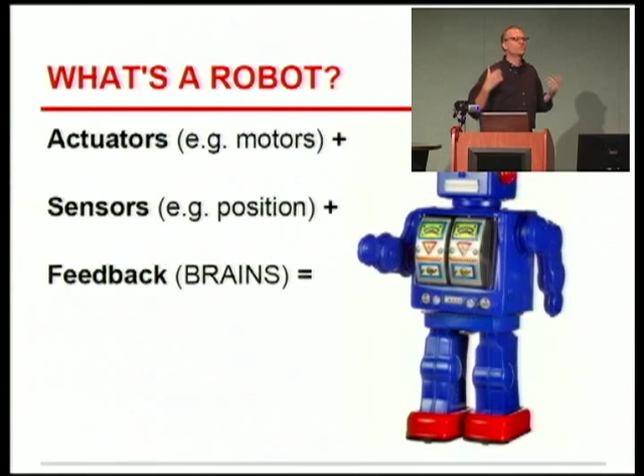Okay, what's a robot? Well, this is my personal take. People may disagree, but a robot for me has to have three important things. It's got actuators, motors to zip it around, or a robot arm. It has sensors, which tell it what it is or what's going on in the world, and it's got some kind of feedback, which tells it what to do based on the sensor input.

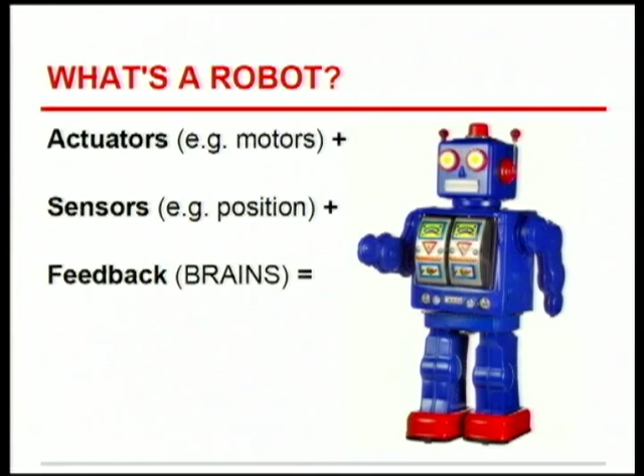Okay, so let me introduce you to my first robot, and this is my friend Chassis. Chassis is basically a mobile kegerator. He's got little motors on the base, and he drives around and dispenses beer from a keg that's stored in his internal unit there.

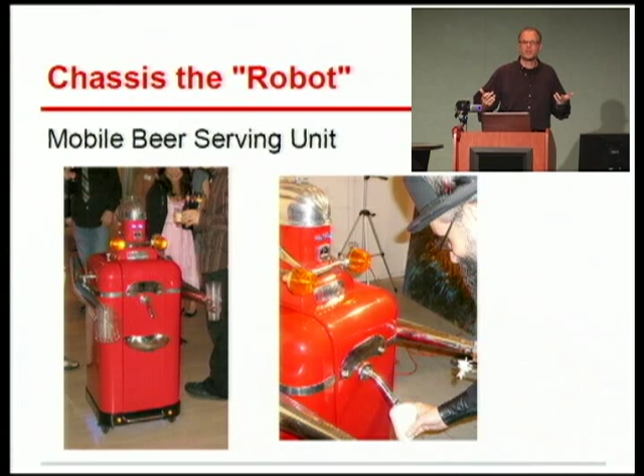Chassis, by my definition, is not actually a very smart robot. First of all, there's no Python. Second of all, there's no real feedback. The way Chassis works is there's some jerk with a remote control, that's usually me being the jerk, driving Chassis around. So he kind of fails at being a robot by my definition.

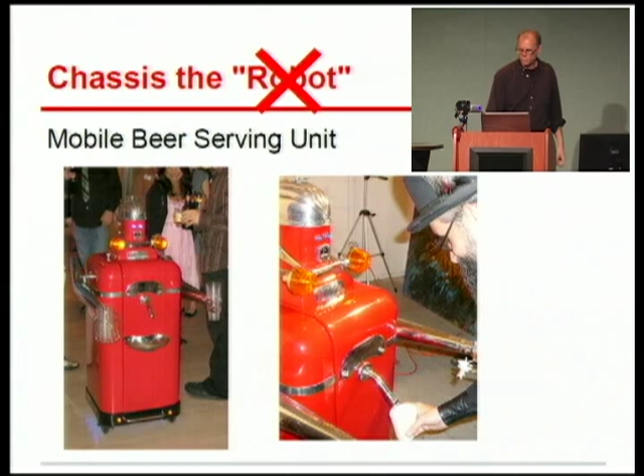Okay, so let me show you something which doesn't look like a robot, but which is closer to my definition. Okay, TCHO is a chocolate factory that's down on the Embarcadero in San Francisco. Anybody been there? If you're down there, the Exploratorium is opening up right next door, amazing chocolate, go down there and get a free taste. But they built a chocolate factory right there in this old warehouse on the Embarcadero.

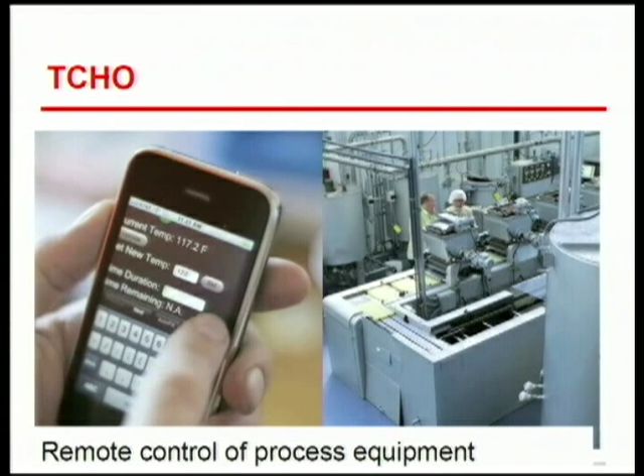And this was founded by some of the people who started Wired, so they wanted some high technology in their chocolate factory. So I helped them with a system that basically lets you control some of the things in the flavor lab from an iPhone system. And this is kind of how it works.

On the right is a nice little iPhone app. It wasn't even an iPhone app, it was a specialized, basically, web server that formatted things nicely for the iPhone. We even got real-time video on it. Basically, we had very standard SQL, Apache web server. Python was the glue that let the web server talk to the equipment, and the equipment talk back to the web server and thus to the iPhone.

So kind of the magic box here, this is an Ethernet to serial port here. Now if you want to do a drinking game in this talk, you can drink every time I say serial. I'm going to say that a lot. Okay, and right down here is a little feedback controller, and this is used to maintain a vat of chocolate at a constant temperature.

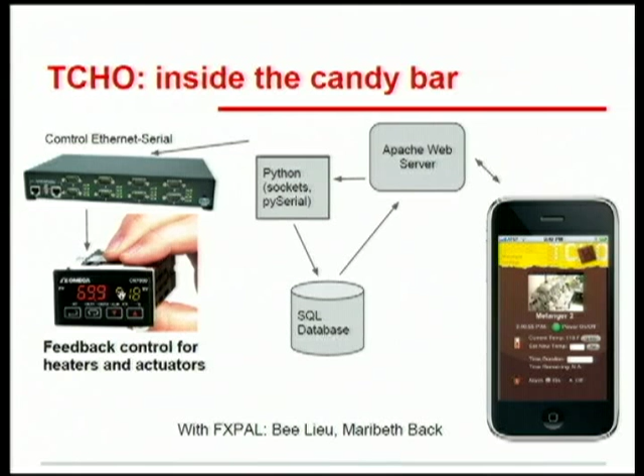It's a glorified thermostat. You put a thermocouple in, it senses the temperature, and then you give it a set point, and then it will turn on the heater or turn it off, basically to keep the vat of chocolate at the right temperature. And you can set that set point over the serial thing from your iPhone, sending something to the Apache web server, which talks to the Python, which sends the appropriate serial commands through this thing to this thing which does the feedback. Okay, what's this feedback thing that I'm talking about?

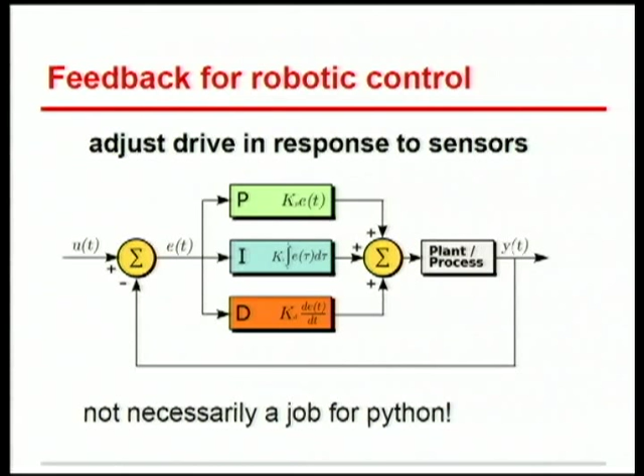Okay, don't worry, this will not be on the test. This looks kind of gnarly, but there's one inside basically every robot and possibly a lot. This is a little feedback loop. This is a classic PID, proportional integral derivative feedback loop. It looks gnarly, it's not actually that gnarly.

Okay, here coming in on the left is you. This is the set point. Think of this as a thermostat. This is the temperature you want your house to be at. Okay, over here on the right is your plant. This is your process, the house you're living in, and it's got a thermometer which tells you what the temperature actually is. This stuff is in your thermostat. You subtract the temperature you want it to be from the temperature it actually is. If it's too hot, you turn on the AC. If it's too cold, you turn on the heater, right? And then it just senses this again.

It does this again and again and again. It's not very bright. It just sits there in this little loop saying: is it too hot? Yes, it is, turn it on. Turn on the AC. Is it too cold? No, it isn't, keep the heat off. Just like that, not very bright.

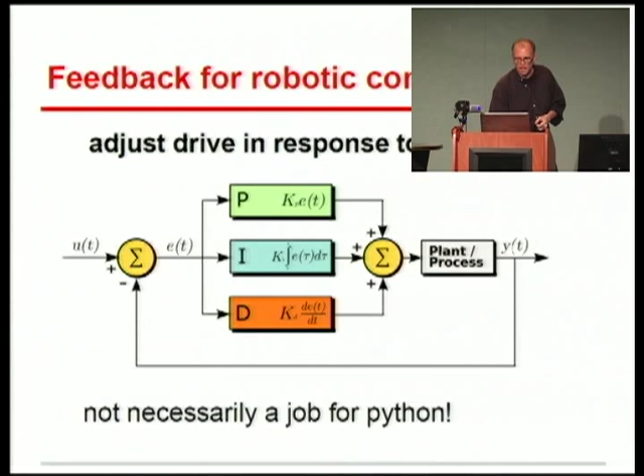So this is where Python comes in the stack. This feedback loop you probably want to do on bare metal. You want to do this as rapidly as you can. It doesn't take much computation. You probably don't want to have to go off and do garbage collection while you're in this loop, especially if you're doing something time critical like a moving robot arm.

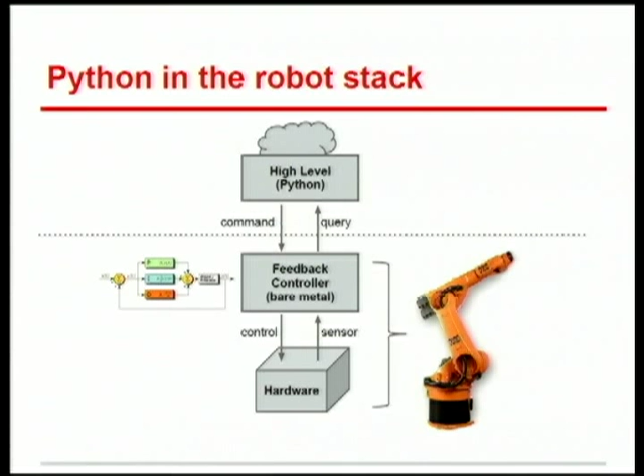Now where Python comes in is on the high level, at least on the systems I've built, where you basically set the set point. You tell the robot arm where to go. You can do that from Python. And up here, this is either a brain or the cloud or whatever it is, because once you've got it in Python, Python has a built-in web server, so you can talk to it basically from anything.

So basically the way to think about this, if you like the model-view-controller paradigm, everything below the dotted line is your model, and then you can control it with commands from Python, and you can query it and maybe display the results in Python. And that's what I've done a lot.

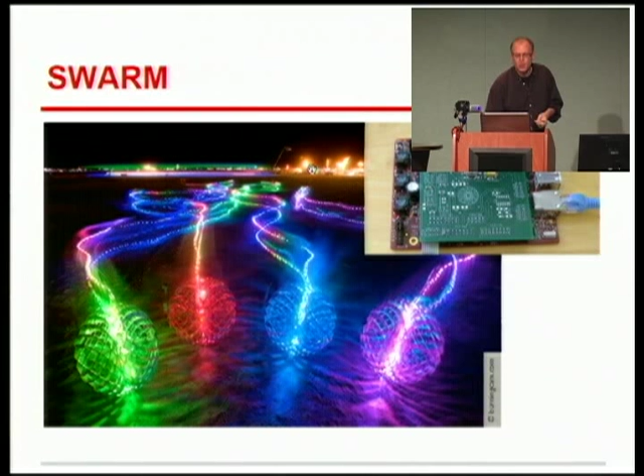Okay, so some more robots. This is Swarm, a project I did with a bunch of friends almost 7 years ago. If you're clever, you can buy these feedback controllers off the shelf—you can buy a robot arm which has this feedback controller built in. We weren't clever. We built all this stuff ourselves, and we had a lot of fun kind of over-engineering this. There were 6 of these things, only 4 showed in this picture.

We controlled them over serial, using a ZigBee wireless protocol, which was sending serial commands to each one of these things from a central brain. And the central brain was running Python. In our early development we used wxPython, which talks to a joystick natively. You plug in the joystick and you can send commands to one of these things.

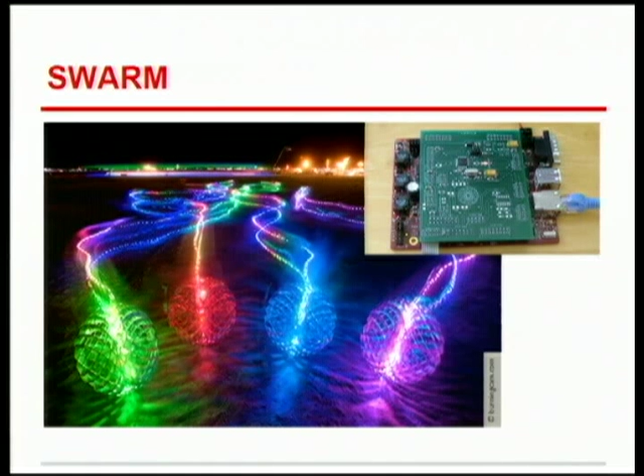Good stuff. Here's another thing. This was really fun—a little Maker Faire project I did, once again using wxPython, which does really nice GUI development. I'll talk about that a little later. Basically I used the joystick to control a bunch of desk lamps I got from Amazon, threw some hobby servos on them, and talked to them, once again using serial, which would send the right control signals to each of the hobby servos to control each of the joints on the desk lamp.

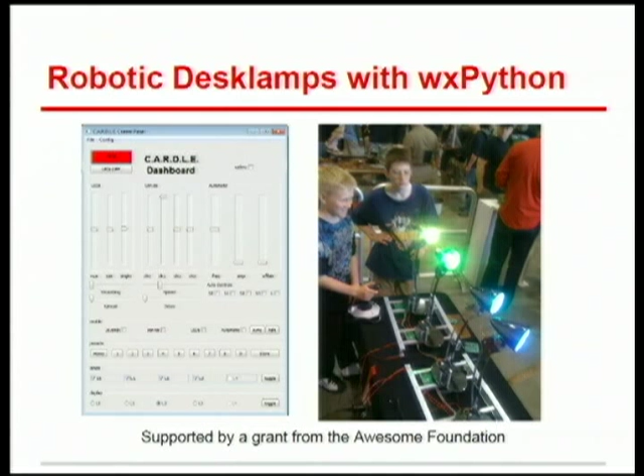So where's the feedback in this? Well, the secret is the feedback is built into these hobby servos, and they're really fun to use. They're really cheap. If you want to get started, you can drive these with an Arduino.

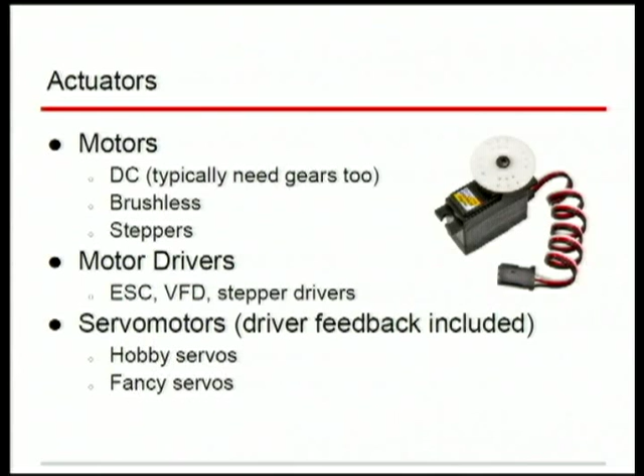Other actuators you might use are bigger motors, DC brushless motor drivers, variable frequency drivers, and servo motors like this—super fancy servos that aren't hobby servos, used for some walking robots, the little things you've seen that play soccer, or I'll talk a bit about a medical device which uses a fancy Swiss one. Okay, so that's the actuators.

On the sensors side—things I've used that you might want for robots. A simple switch, basically: if you've got a MakerBot with a gantry and you want to know when it hits the end, since you're driving with a stepper motor and don't know where it is, you just put a limit switch on it, and that's something you query with hardware. Position encoders—if you've got a robot arm, you want it to sense the angle. IR sensors tell you how far away you are. A glorified version of that is a laser scanner, which has a rotating element. Google uses that on their self-driving cars. You can put one of those on a Roomba and do something called simultaneous localization and mapping, or SLAM.

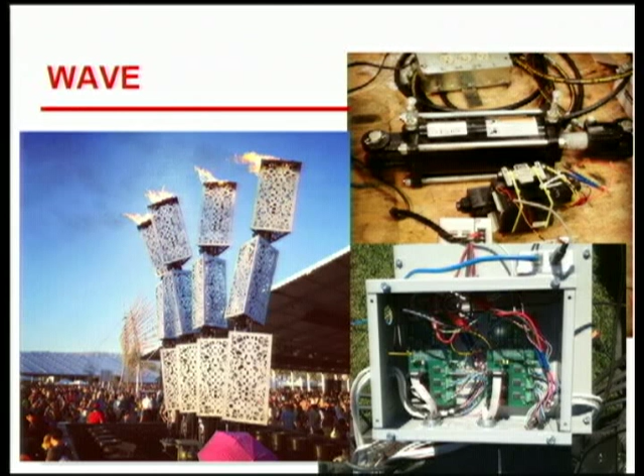Kind of amazing. Now, is there anything scarier than a 30-foot robot hydraulically actuated with flames? I'll have to confess there is. This is something I'm working on for a client—a surgical robot. It's for keyhole surgery, and it uses a water jet to remove tissue rather than cooking you with a laser or cutting you up with knives.

Yes, it's running Python. This GUI is written in wxPython, but don't worry, we're using these expensive Swiss motor controllers to do the actual actuation and position control. And right there is a little serial port on that motor.

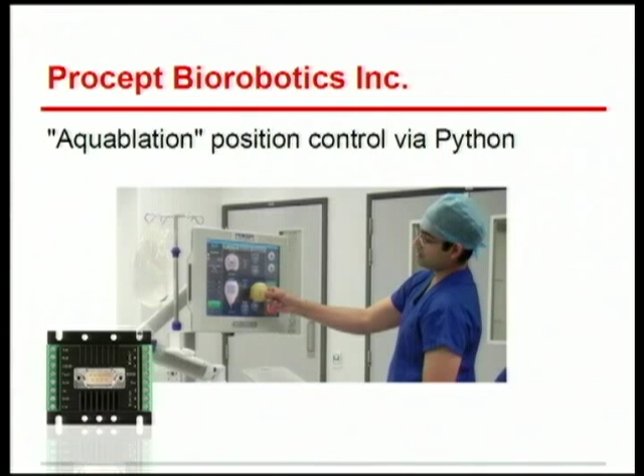Okay, so let's talk about Python and let's talk about serial, because lots of things I've talked about use serial. I'm really happy to see something with a serial port because it means I can control it. The secret to this is pySerial, which is a library. It works on pretty much every machine I've ever tried it on, and it takes over the COM port if you have physical COM ports.

Those are serial ports. Nowadays nobody has those anymore, but there are these USB serial controllers. They cost $15, you plug them in, and they just work. So pySerial is kind of the Babelfish of hardware—it's great, you can talk to anything with it. You just say import serial, open that particular serial port, and you're good to go.

Now serial may look gnarly, and there are a lot of different flavors of it. I just want to give you some of this alphabet soup so if you see this in the future you can say, oh, that's serial, and not freak out. There's the two-wire interface and I2C—those are very common inside hardware things, probably a couple in your laptop. One is talking to the temperature sensor, one is turning the fan off and on. If you've ever wondered how your laptop knows what monitor plugs into, there's a little I2C serial line on your video connector saying, hey, I have this resolution, I can do this thing. It's transparent, but it's there.

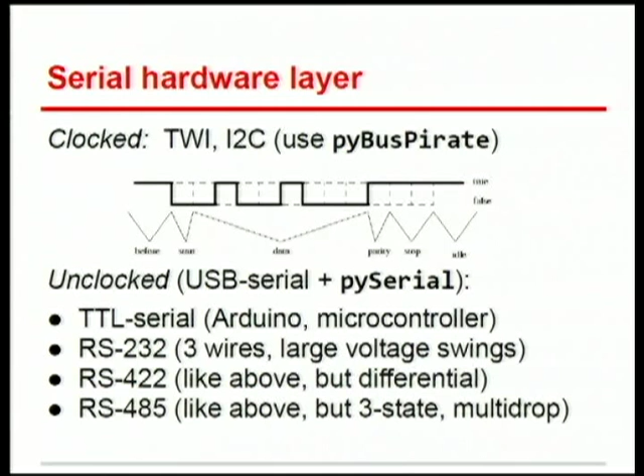Okay, so here's some of the protocols that run on these serial hardware layers. There's a custom one—when I do a custom one, or use other people's, quite often it's ASCII, which is nice because you can open Minicom or Hyperterminal, type in a command, and the thing will take it, and you can read stuff back. Modbus is a very common industrial controller, used in factories. It's a little gnarly, it has a checksum at the end of every packet. This is good when you're controlling things like giant crushers that could crush you—you want lots of error checking before you send the signal to turn it on.

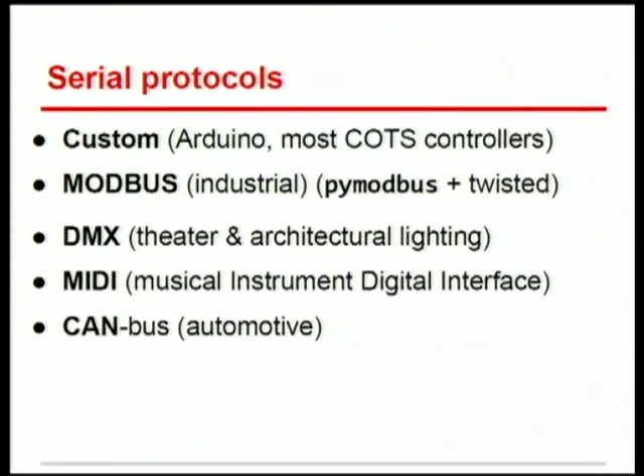DMX is also very common for theater lighting, and more and more it's being used for LED displays. That's basically just a serial thing—I've done that in pure Python, generating DMX. MIDI, musical instrument digital interface—you can get a little shield for your Arduino that does that. And the CAN bus, which is automotive, I won't go into that.

Okay, so formatting serial data—I said ASCII is great. The way pySerial works is that you just open this thing like a file.

This is a serial port, and you can just write to it, which sends whatever data you have down the pipe, and you can read from it. If someone's sending you data, you just read it, just like reading a file.

It's great. Pro tip: be careful, some things are line-based, and some things care whether you use a carriage return or a new line. I've wasted half a day on this on several occasions - why doesn't this thing work? Oh, because I used the wrong line terminator. There's only two, so you can try every combination if you have to.

Some things want binary data, some things give you binary data. Some friends of mine who aren't Python people say, oh come on, Python, you can't do this. Of course you can. Byte array - byte array is great.

You just give it data in an ASCII representation, and it'll pack it into an array of bytes. And if you need more complicated stuff, like dealing with floating point numbers, there's struct.pack and struct.unpack. Those are all built in, and I use them all the time.

They're really fun. Okay, probably the gnarliest thing I've come across is dealing with asynchronous hardware. This happens because you tell the robot arm to go to a certain place, and it takes a while to get there - a long time in computer time.

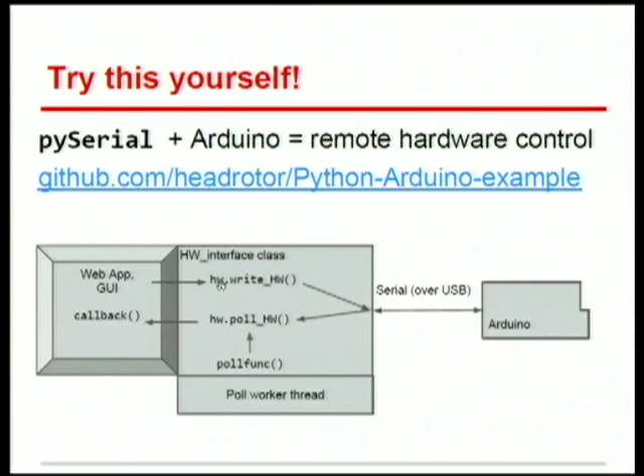When it reports back, there's a polling thing that says, hey, is there data? If there is, then it gives you a callback. Otherwise, you can just use the class and write to it like a file.

Okay, getting towards the end of my talk, I just want to give you some goodies here. There's this thing called Open Sound Control. Anybody heard of that? It's really neat. And there's a Python module - at least two Python modules, pyOSC and Simple OSC or something like that.

There are clients for iOS and Android, and this talks over UDP packets, so over wireless. So you can sit there with your Android or your iPhone, and you can even hook it up to the accelerometer on that and use that as an input to send data to your robot, or you can get status back from your robot and display it on the screen.

That's really fun. A friend of mine made a robot out of a milk crate and an old laptop, an ancient laptop, and he uses this to control it with a little tablet. Basically uses like a tank drive. You can move these sliders, which controls the wheels and drives the thing around.

1 Minute Python. If you're new to WX Python, if you've never used it, go check out 1 Minute Python. It's great. You can get a GUI up and running on Linux, on your Mac, on your Windows thing in literally a minute. It really is that easy.

It's great. And there's also something which I haven't used called the Robot Operating System. I think that was mainly done at Willow Garage up in Menlo Park. And that has, I think, a lot of really neat modules, like I talked about the simultaneous localization and mapping. I haven't used it, but it looks like it's really powerful.